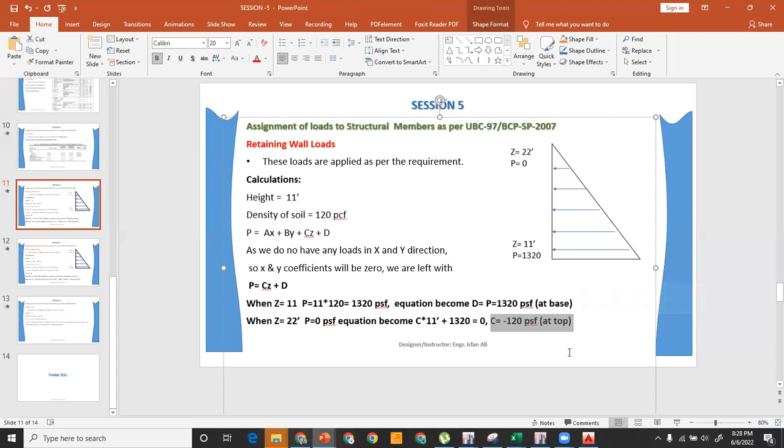The next is about the second retaining wall, which is the basement 2. In that case, the Z is 11 and the pressure coming from the top is 1320, and the Z is 0, which is the depth for 22, and the pressure will become 2640 PSF. Again, the calculation is Z is equal to 0, so the P will be 22 times 120, and it will be 2640 PSF, and the D will become 2640 PSF at the base.

Similarly, when the Z is 11 at the top, the P is already 1320, and in the previous case it was 0, so this time it is 1320. So the equation will become C into 22 plus 2640 is equal to 1320, and this will become C is equal to minus 60 PSF at the top.

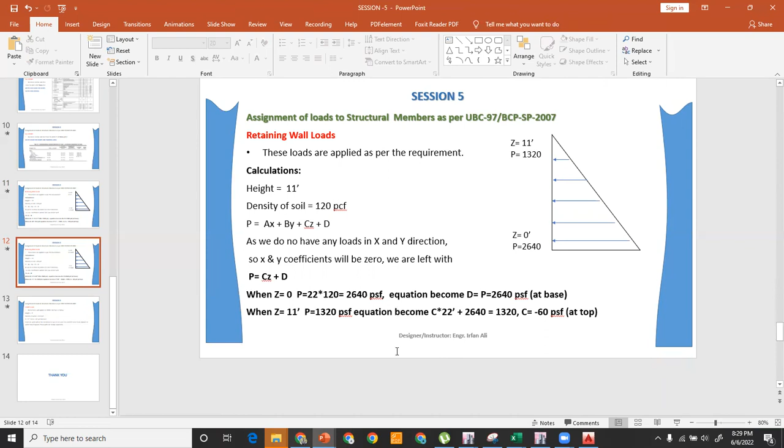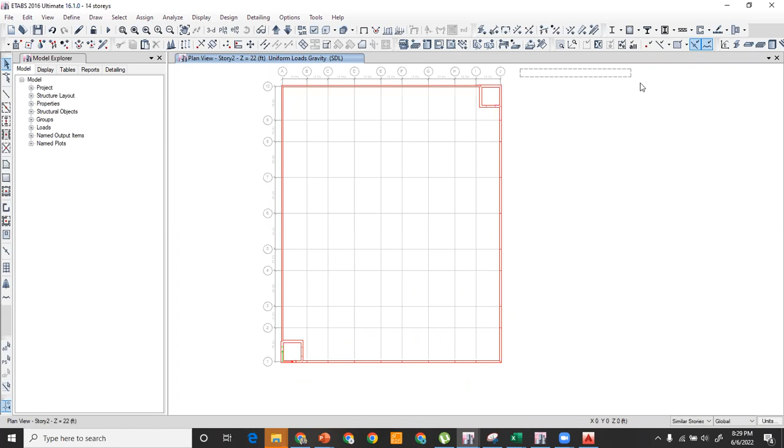So we will apply these values in the ETABS software. We will go to the software and show the walls only, and let the floors disappear. We will go to basement 1. This is the walls of basement 1. You have to select the walls of this basement and make it 1 story, and these are the walls.

In which you have to apply the loads. These are the walls of the first story basement, in which the soil pressure will be up to a depth of 11 feet.

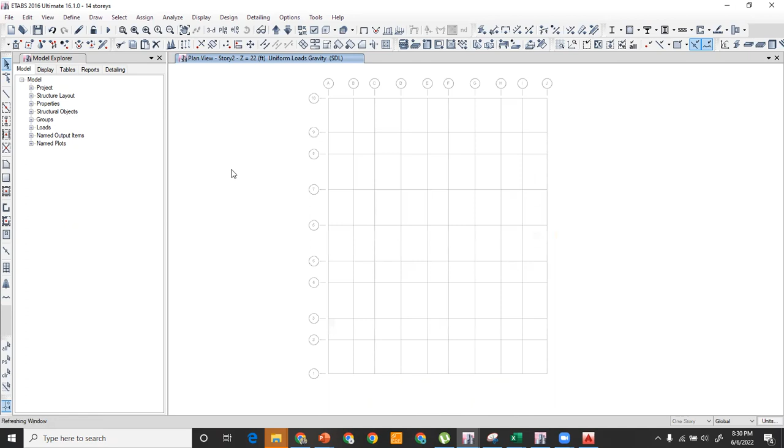So you have to go to assign shell loads and click on this non-uniform option, and select the pattern, which is the SDL, which is superimposed dead load, and the direction is gravity. Now you have to check it for the local axis, whether the local axis of my walls are inward or outward, and then apply the load accordingly.

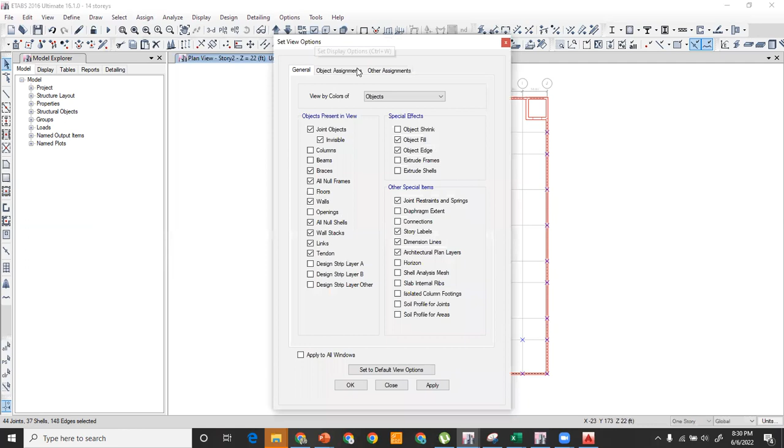So close this and go to the set display option, click on the other assignment, and there is an option in the shell assignment. This is the local axis, click on apply, and you can see the local axis is in the inward direction. It means the blue arrow is the local 3 axis. It means if you apply the soil load in the local 3 axis, it will be from the outside. So you have to make sure that this arrow is downward at the inward direction.

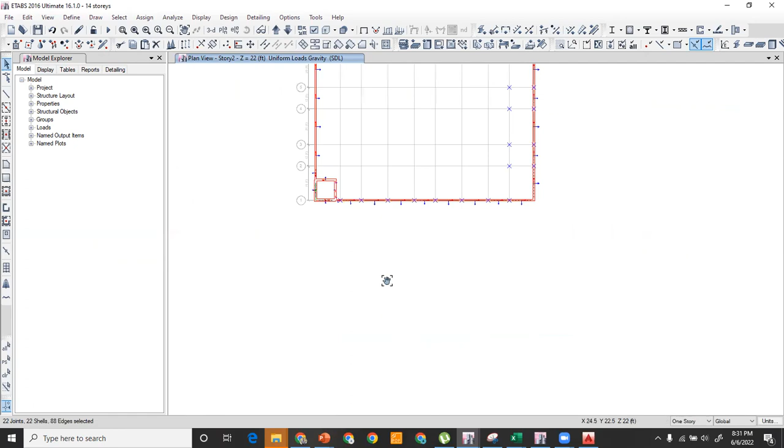If it is not, then you have to make it inward towards the building. So this is outward, this is outward, and then you have to go to the edit shell, and there is an option reverse wall local 3 axis, and now you can see that the direction of the wall has been changed from outward towards inward. You have to reverse local 3 axis.

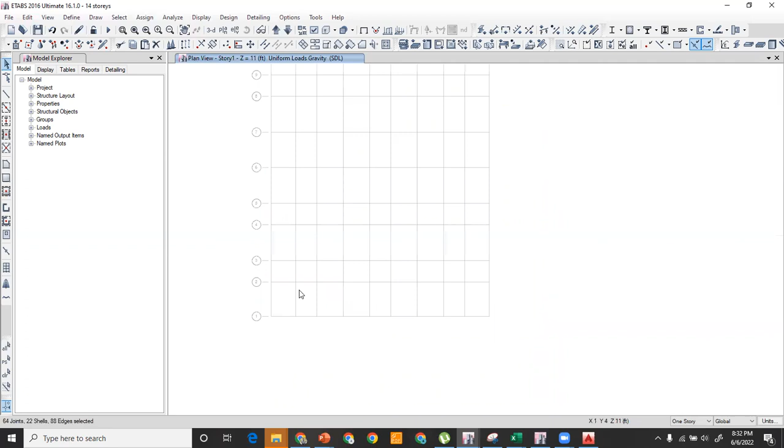So when you apply the loads in these local 3 axis, it will be acting as a soil pressure towards the wall. Let us go downward, and again in the downward we have the direction outward towards the outside, so you have to make it inside.

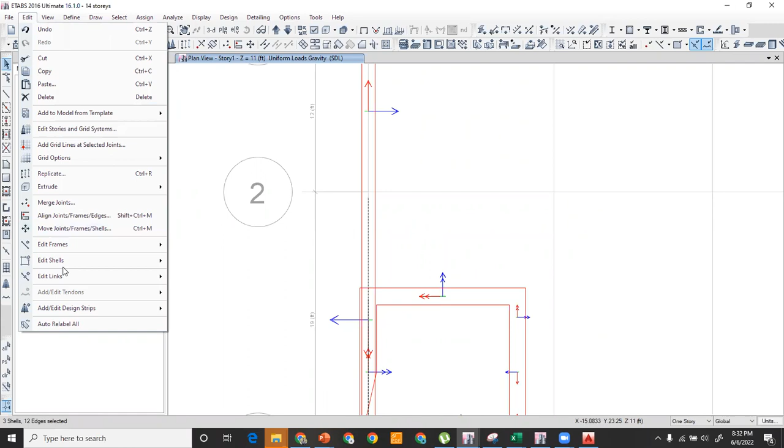In order to apply the soil pressure, go to the edit shell, and reverse local 3 axis. So now when you apply the soil loads in the local 3 axis, it will be the soil pressure towards the building.

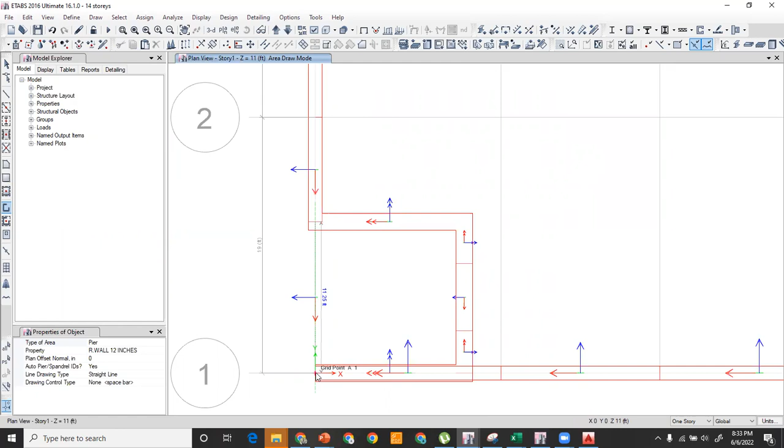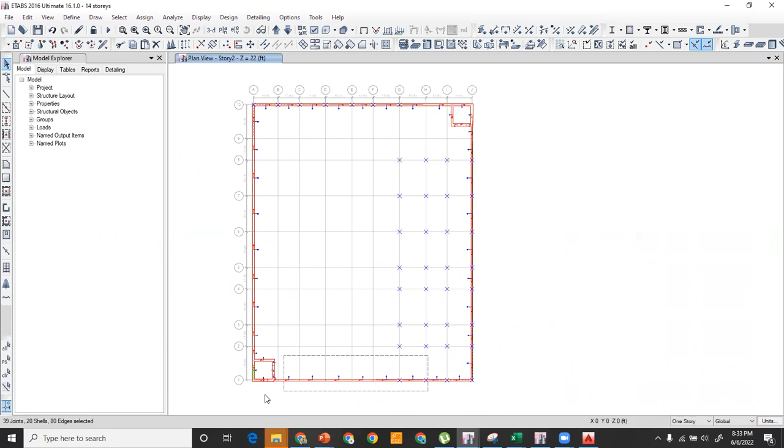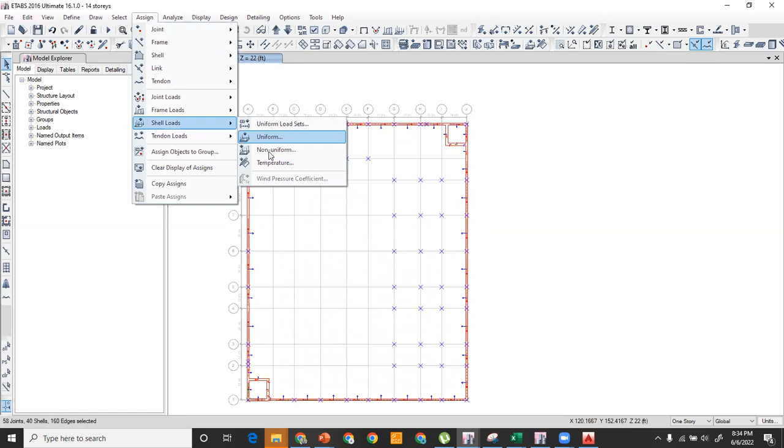Now again you have to go to the upper basement, and you have to select those walls in which you want to apply the soil pressure. And now go to assign shell loads non-uniform, and it is SDL, in the direction of local 3 axis.

And now these are the different coefficients A, B, C, D. So in our case, C is minus 120, D is 1320 because it is positive. But when the local axis is outward, you have to reverse this value - insert positive where it was negative and negative where it was positive. So the results will be the same. You have to click on apply.

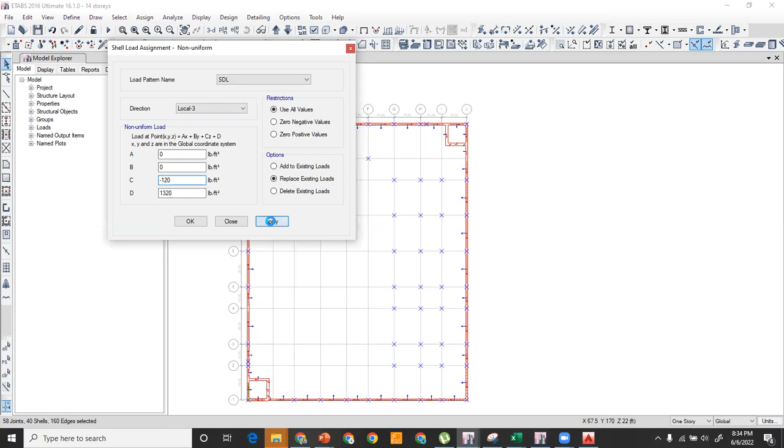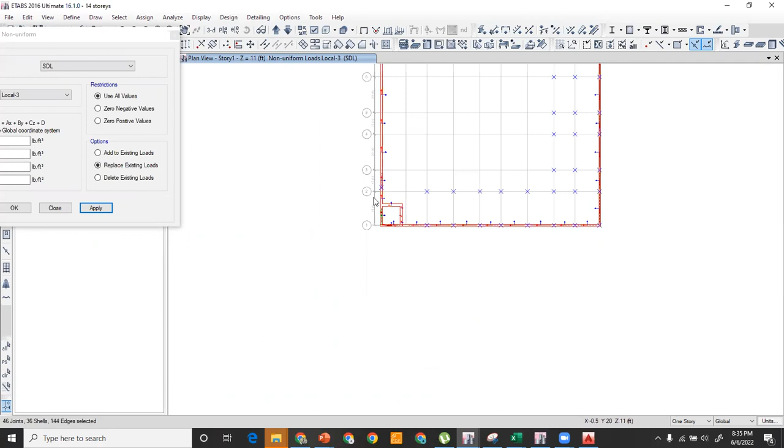So this load has been applied on the basement wall. The lower basement, basement 2, you have to select these walls, and again you have to apply the coefficient, in our case minus 60, and this is 2640, and click on apply in the local 3 direction.

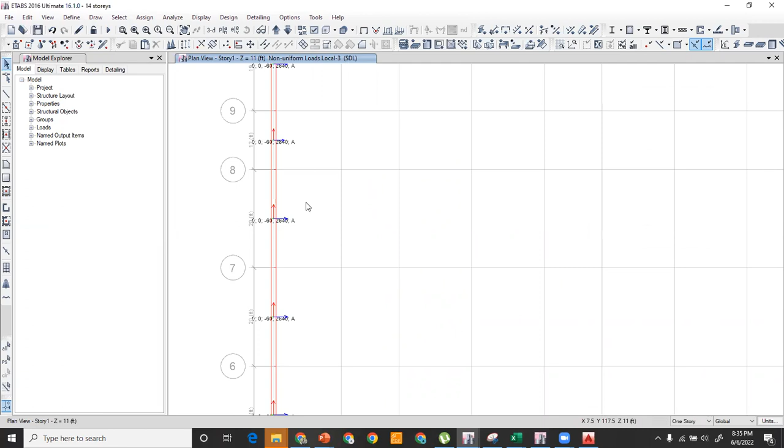So this is the way you can apply the soil pressure, wall pressure, or any type of pressure which is acting in the triangular shape. You can apply this using the coefficients A, B, C, D.

And if you right click on the shell, you can see that the non-uniform load SDL has been applied with the A, B coefficient 0, this is C, and this is the D coefficient. So this was the whole story about the assignment of the load on the retaining walls.

Now, the loads on the overhead water tank. The water loads will be applied on the overhead water tank bottom, which is the slab of the water tank, and normally the height is kept as 5 feet. The density of water is 62.4 PCF. So if we multiply the height with the density, we get the area load, which is 312 PSF live load.

And the wall loads on the wall will not be considered, as we do not want our seismic forces to be applied on the water tank. However, these walls can be designed separately.

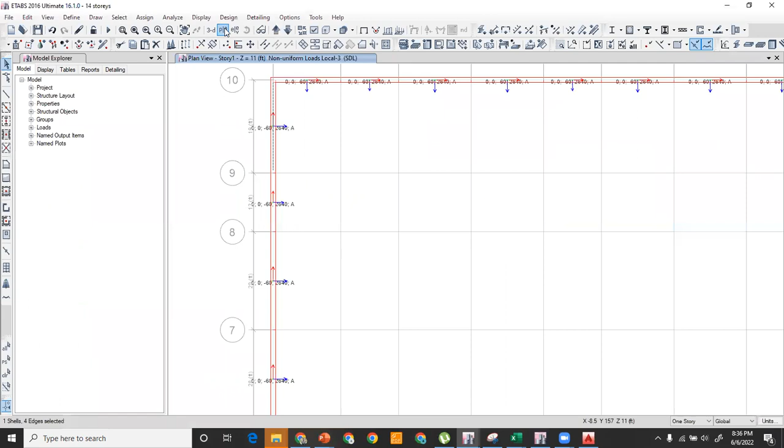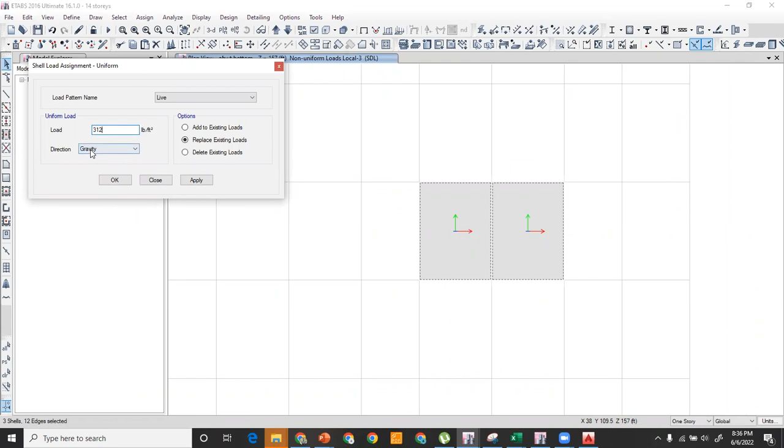So we'll go to the software, go to the plan at the overhead tank bottom, display the floors, select these two, go to assign shell loads uniform, select the live load, and insert 312 pound per square foot in the direction of gravity. Click on apply. It's okay, right?

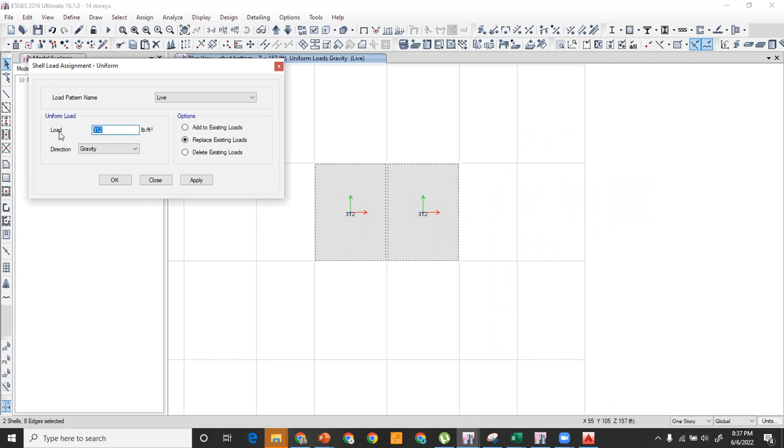You can also apply some SDL if you want to do terrazzo floors or chips inside the tank. So you can assign 30 pound per square foot in the bottom of the tank, which is SDL. Right click on it - so this is 30 and live load is 312 pound per square foot.

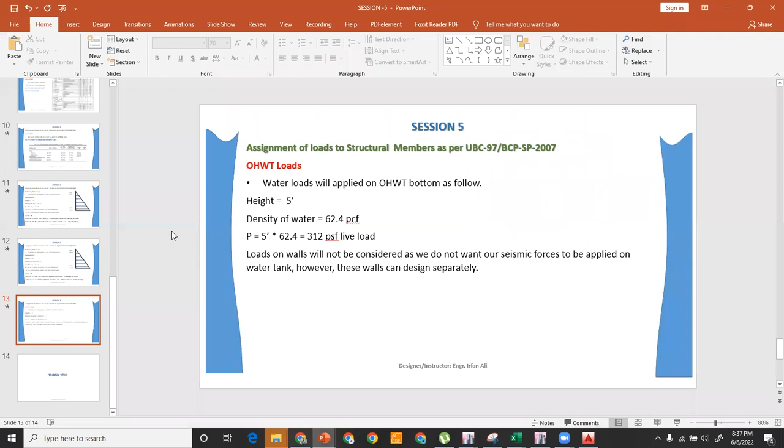So this was the whole story about the assignment of the loads. The next session is about the discussion on the results. If you analyze your structure, what are the different things you can see if you are doing your research or doing manual calculations - you can check the different options available in Etabs.

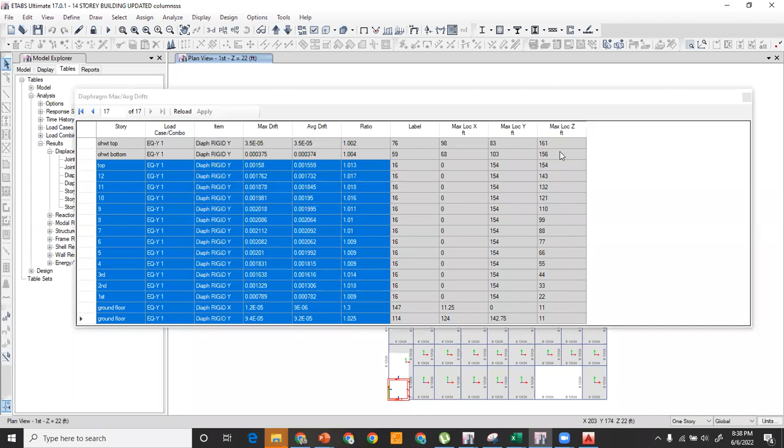So after the analysis, you can check the deformed shape, which is the deflections, shear force diagram, bending moment diagrams, and shell stresses as well. So I have already run the analysis. So let me show you some of the results from the analysis.

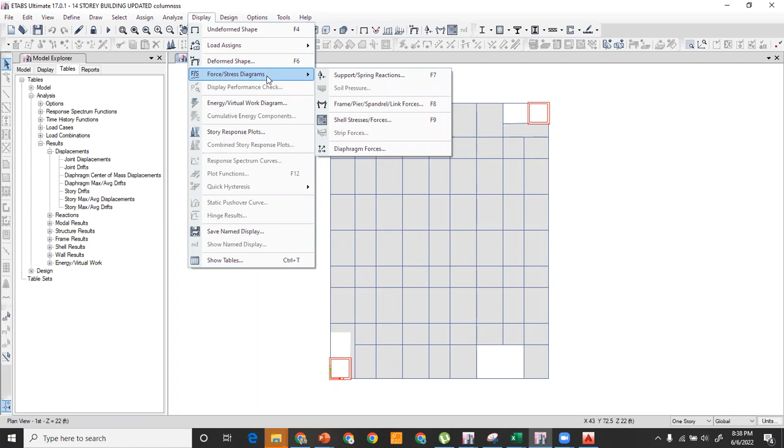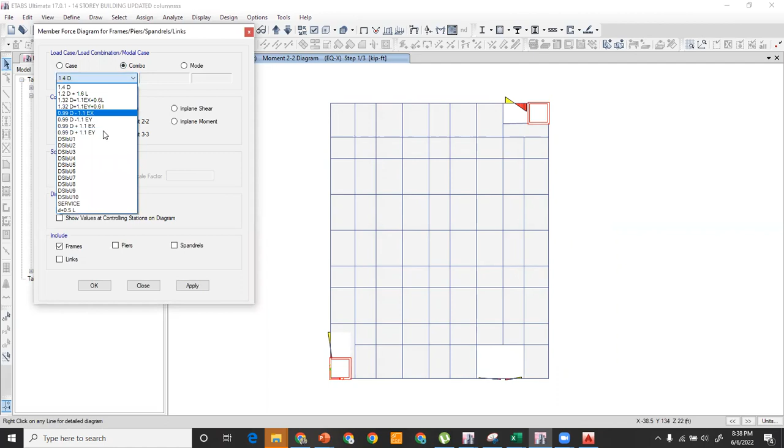Right? So you have to go to the display, and in here you can see the deformed shape, or you can check the force/stress diagram. You have to click on the frame forces, and here you can check the bending moments in the beam and the column for your desired case. If you want to check it for the live load, dead load, SDL, earthquake in X direction, earthquake in Y direction. If you want to check it for the load combination, whatever combination you want to check, for example, 1.2D plus 1.6 live.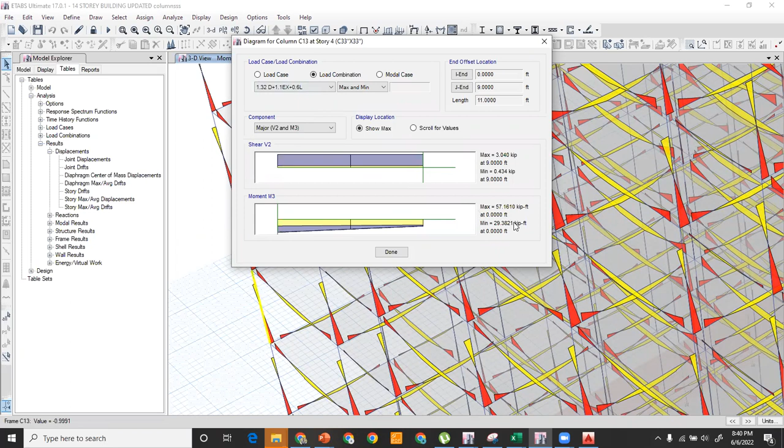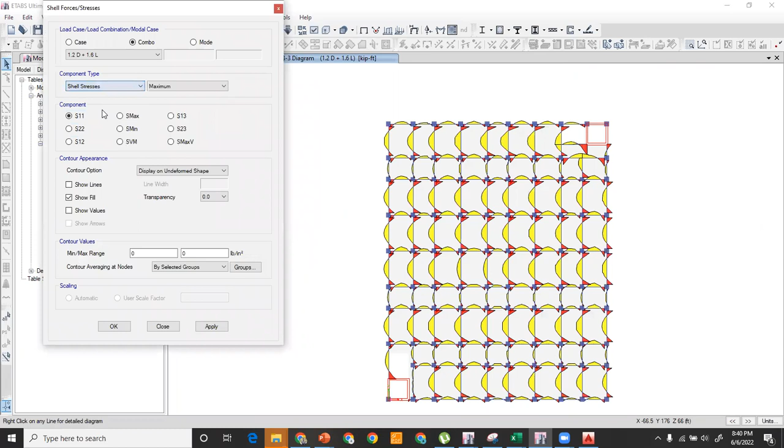You can also check the stresses in your slabs as well. If you go to the display, go to the force/stress diagram, click on the shell stresses/forces, you can also check the stresses in the slabs. For example, this is S11, which is in the direction of X when the normal is acting in the X direction, and this is S22 when the normal is in the Y direction, the stresses in the Y direction.

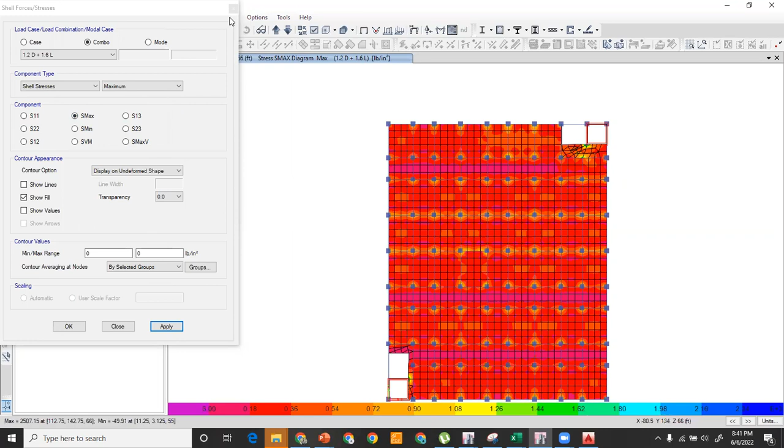You can check different ones. These are the normal forces. These are the shear forces, right? And these are the principal stresses, maximum and minimum stresses. You can check as per your requirement. You can also check the deflection. For example, you can go to the... because it's taking too much time. The model is too heavy.

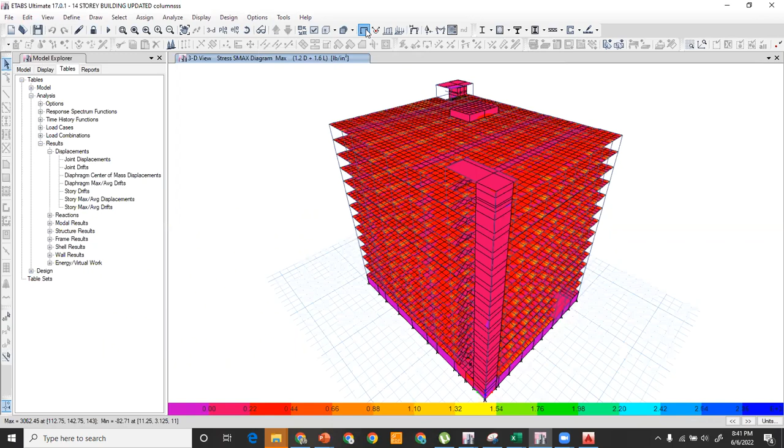Let me check this, and you can go to the display, click on this deformed shape, and you can check the deformed shape of your building in any load case. For example, for the dead, you can check the deformed shape for your dead. You can check for the load combo 1.2D plus 1.6L or any other combo as per your requirement, what is happening in my structure, right?

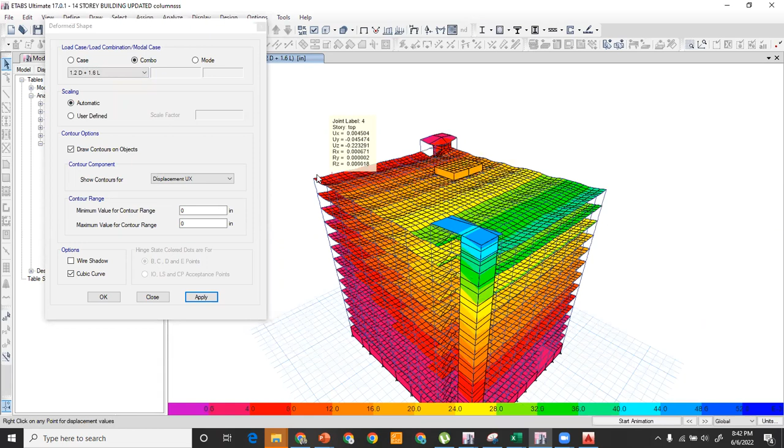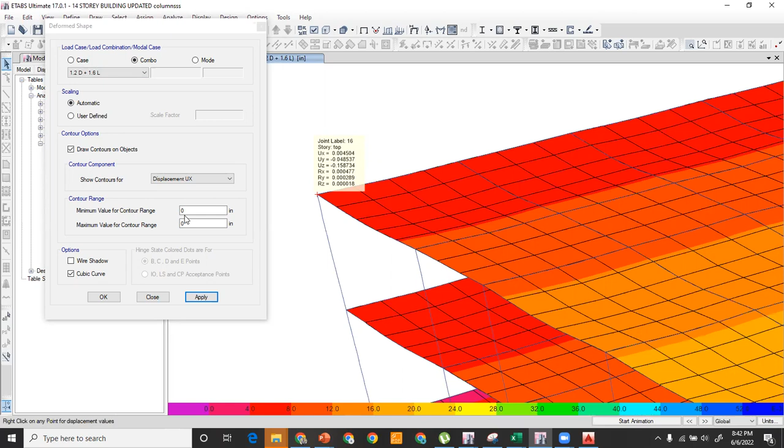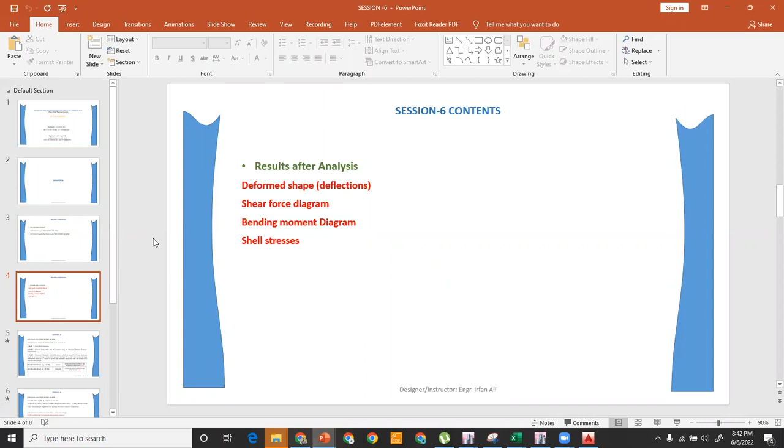And you can check the deflection of each corner, the deflection of the beams, deflection of the slab. For example, if you click on the joint, you can see that there is a deflection in the direction of X, Y, Z, and there is a rotation in X, Y, and Z. These are the 6 degrees of freedom for this joint, right? So this is how you can check the bending moment, shear force diagram, and deformed shape for the different structural members as per your requirement.

The next is about the drift check and the torsion irregularity check, and I think this is enough, and we will continue this session tomorrow, and we will perform this drift check and torsion irregularity check in the next session. So if you have any questions up till now, you can ask.

Sirji, the UBC 97 Pakistan building code...